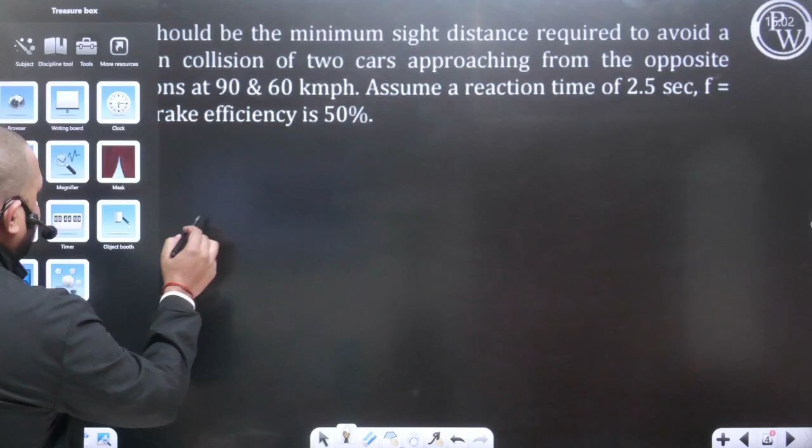So now we will start the discussion. First, starting with transportation engineering, this is question number one from transportation engineering. Everyone try to solve this question, and I will provide you 1 minute time for this question. For every question you are going to get 1 minute time, so in this time try to solve the question. Your time starts now, and tell me what will be the answer for this question.

So after 1 minute, we will have the detailed discussion.

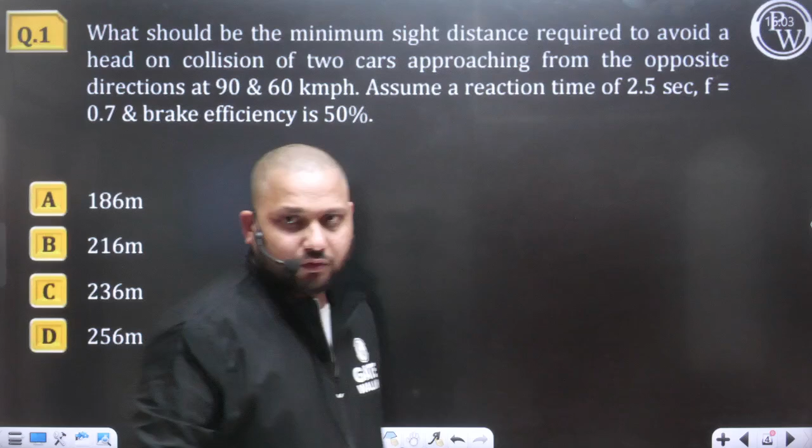Let's see the discussion for this question, let's see the solution part, and we are going to solve this question. So listen and see carefully. What should be the minimum sight distance required to avoid a head-on collision of two cars approaching from the opposite direction? As per the data given in the question, two cars are there, let's say car A and car B. These cars are approaching towards each other, and to avoid the head-on collision, what should be the minimum distance, what should be the visibility that should be available, that we need to find out.

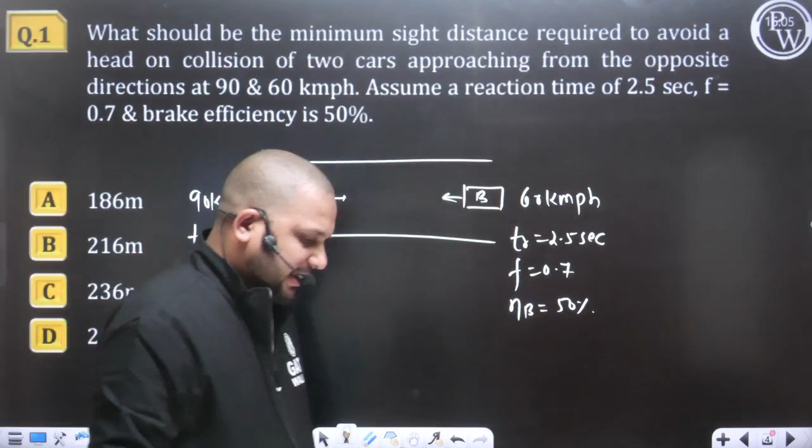The speed of vehicle A is given as 90 kmph, and speed of vehicle B is given as 60 kmph. Reaction time for both drivers, TR, is given as 2.5 seconds for both vehicles. F is given as 0.7, and brake efficiency is given as 50%.

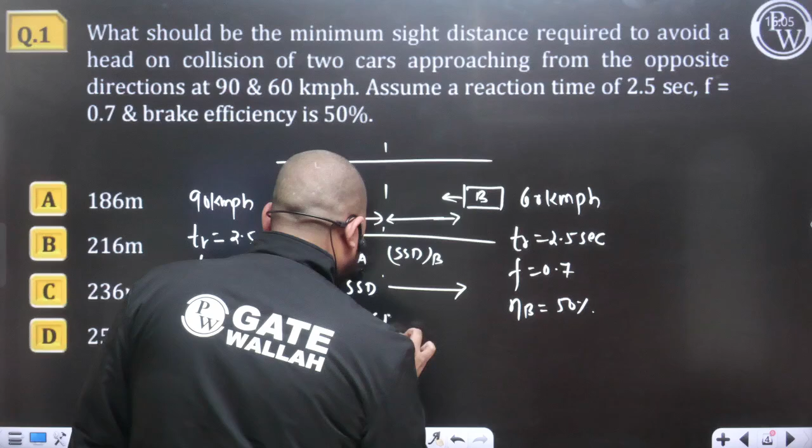So we have to consider the brake efficiency factor also for calculating the SSD. But for this case, we know when two vehicles are approaching towards each other, the minimum sight distance that should be available on the road to avoid the head-on collision is the distance required to stop vehicle A, which is SSD A, and similarly the distance required for vehicle B is SSD B. So the total visibility that should be available, that is the total SSD, will equal SSD A plus SSD B. So in this question, you need to simply calculate the SSD required for both vehicles, and the entire data is given to you.

So we can easily calculate the SSD. First we will calculate for vehicle A: SSD is V into TR plus V square upon 2GF. For the value of F, we can consider 0.5 into 0.7, that is going to be 0.35, considering the effect of braking efficiency.

So just put in all the values. For vehicle A, speed is given as 90 kmph. So we can write 90 into 5 by 18 plus 90 into 5 by 18 whole square, divided by 2 into 9.81 into 0.35.

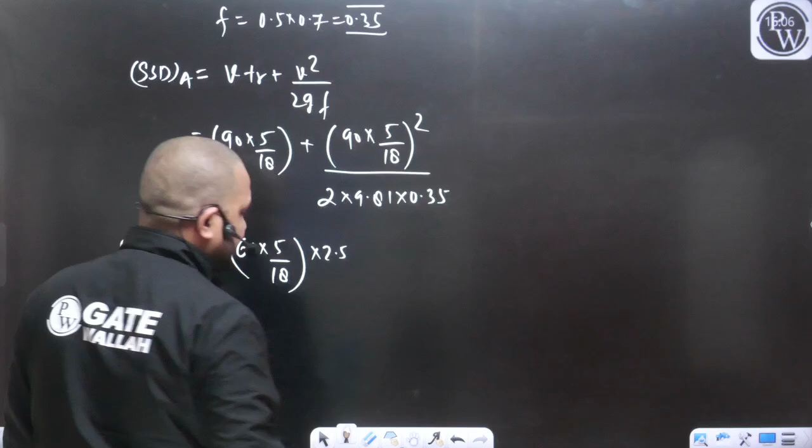Similarly, we can calculate the SSD for vehicle B, and the speed for this vehicle is given as 60 kmph. So 60 into 5 by 18, V into TR, 2.5 seconds that is the reaction time, plus 60 into 5 by 18 whole square, divided by 2 into 9.81 into 0.35.

So in this way you can calculate the SSD required for vehicle A, and similarly you can calculate the SSD required for vehicle B. To avoid the head-on collision that we just discussed, the minimum visibility that should be available on the road is SSD equal to SSD for vehicle A plus SSD for vehicle B. When you perform the calculation for both, the net resultant value you get will be approximately 236 meters.

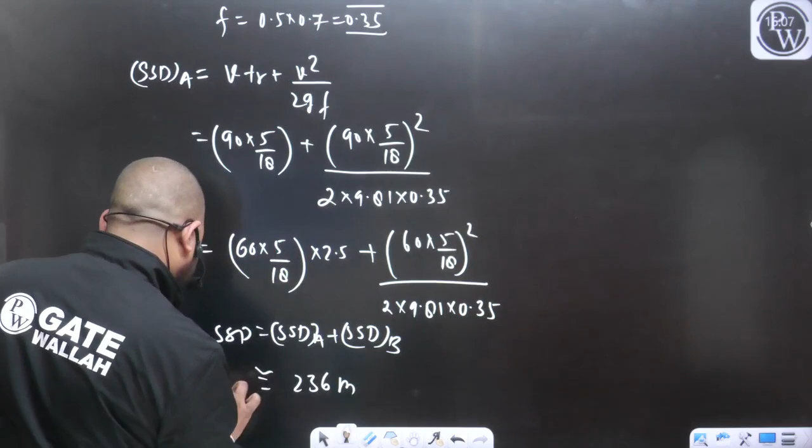To check the calculation part, that should be the answer. So for this question, that should be the answer. Based on this explanation, you can mark option C as the correct answer. So C is going to be the correct answer for question number 1.

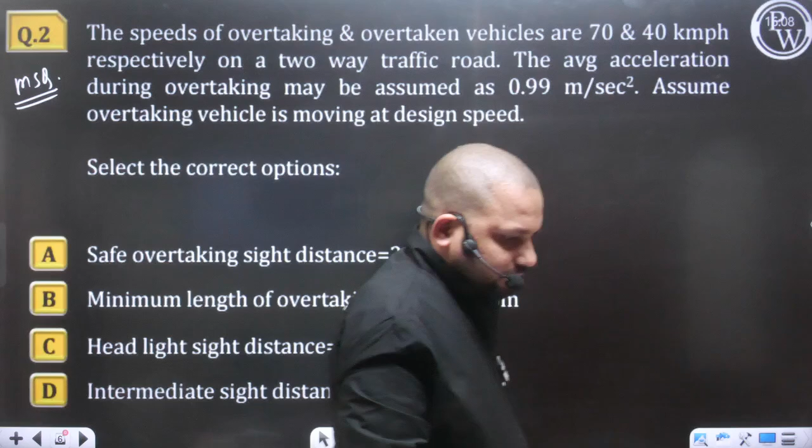Okay, very good. So now let's move to question number 2, and similarly try to solve this question. This question is MSQ, the format of this question is MSQ. Here you have to mark all the correct statements. Everyone try to solve this question, and I will provide you 1 minute 30 seconds time to solve it and tell me what the answer will be.

Okay, so I got the answer A and B. What about C and D? C and D are incorrect. So check all the statements, check for A, B, C and D, and mark the correct statements.

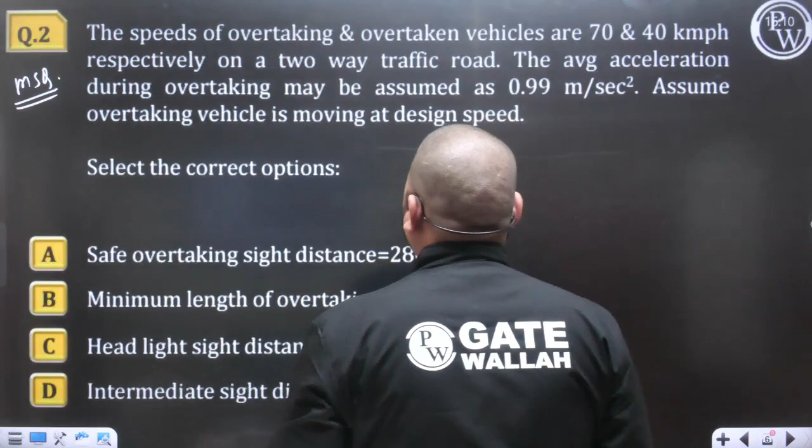Now we will have the detailed discussion on the speed of the overtaking and the overtaken vehicle. So let's see the discussion. Speed of the overtaking and the speed of the overtaken vehicle is given as 70 and 40 kmph, 70 kmph and 40 kmph. No problem.

Respectively, on a two-way traffic road, the average acceleration A is given as 0.99 meter per second square. Assume the overtaking vehicle is moving at design speed. Select the correct options below. First, we need to calculate the OSD.

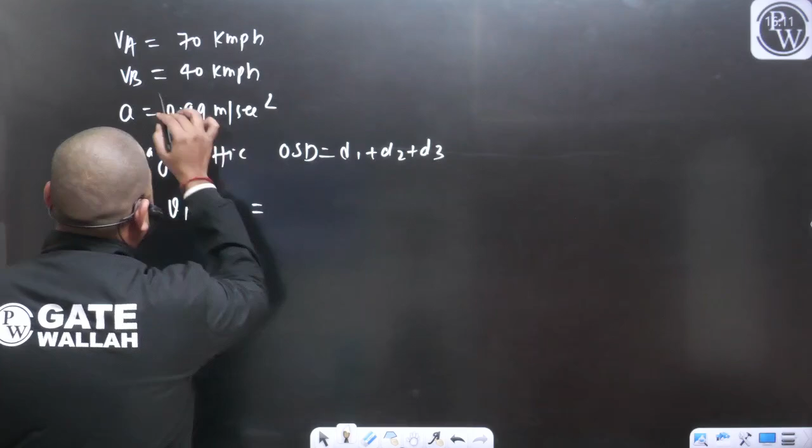So we can write for two-way traffic, OSD will be equal to D1 plus D2 plus D3. Yes, D1 plus D2 plus D3. We can calculate all these values. D1 is going to be VB into TH. VB is given as 40, so 40 into 5 by 18 into hesitation period, which we can consider as 2 seconds. From here we can calculate the value of D1.

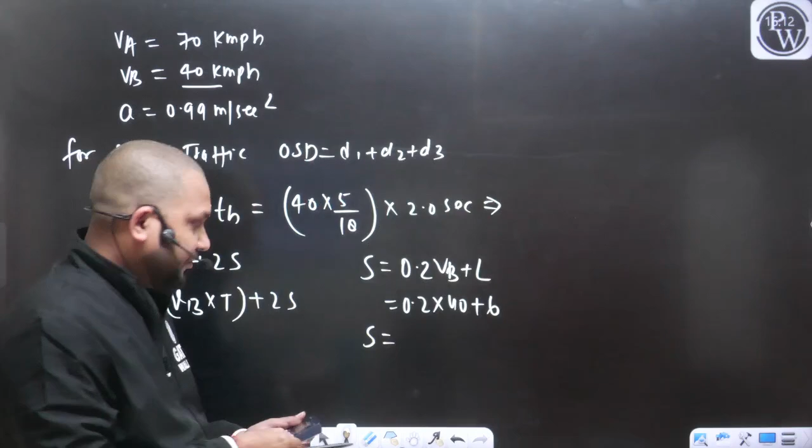Similarly, D2 is going to be VB into T plus 2S, which we can also write as VB into capital T plus 2S. The space headway we can calculate as 0.2 VB plus L. So 0.2 VB is going to be 40, L we can assume as 6 meter. The value of S you will get as 0.2 into 40 plus 6, that is going to be 14 meter.

So with the help of S we can calculate T. T is going to be under root of 4S upon A, so that is going to be 4 into 14 divided by 0.99. So T you will get in seconds: 7.52 seconds, that is going to be capital T.

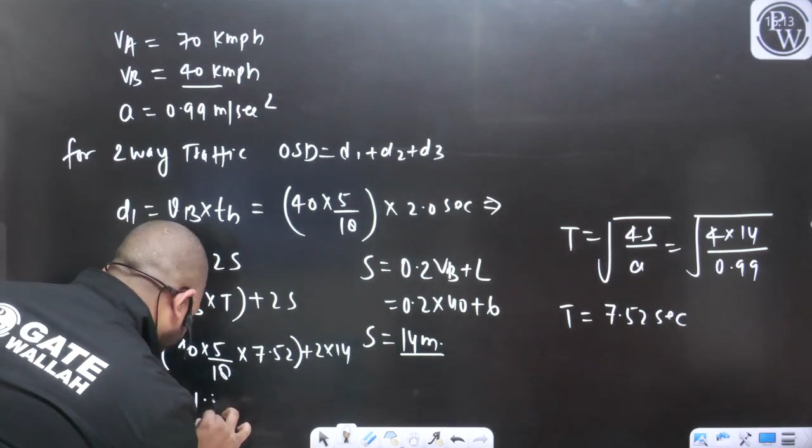Now we can find out the value of D2. D2 will be equal to VB, which is 40, into 5 by 18 into 7.52 plus 2 into 14, and that will be equal to 111.55 meter. Now we can calculate the value of D3, and D3 is going to be VC into capital T. We can assume VA is equal to VC. So this will be equal to 70 into 5 by 18 into 7.52, and that will be equal to 146.22 meter.

So now we can calculate the OSD. OSD will be equal to D1 plus D2 plus D3. D1 we have calculated—D1 we have not calculated. Let's calculate.

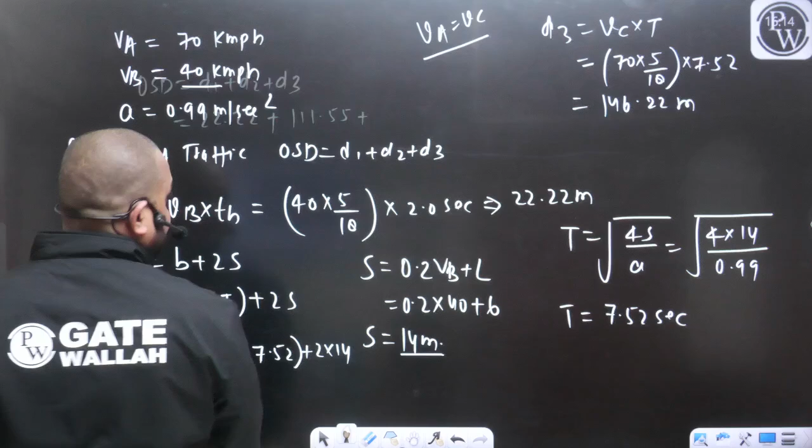So D1 is going to be 22.22 meter, D2 is going to be 111.55, and similarly D3 we have calculated as 146.22. So total OSD that is required will be equal to 279.99 meter. This is the value of the required OSD.

This is the value of the required OSD for the given data. So option, safe overtaking sight distance is equal to 280.2 something. So option A is correct.

Minimum length of the overtaking zone. So we know OSD is going to be, let's say, 280. So minimum length of overtaking zone, we can check for B. As per IRC, this is going to be 3 times of OSD. So 280 into 3, that is going to be 840 meter. Statement B is also correct.

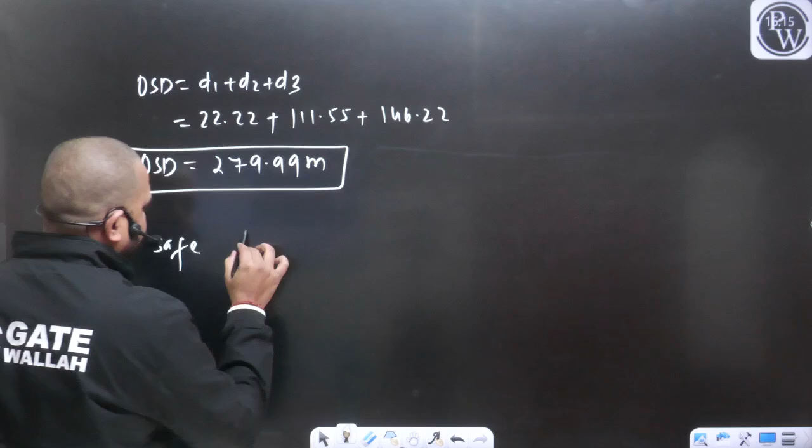Headlight sight distance is 100 meter. To check for this statement, we know for safe traffic operation, HSD should be equal to SSD, and that is going to be V into TR plus V square upon 2GF. Instead of GF, we can use the term A. So this is going to be V into TR plus V square upon 2A. And the design speed we can consider as 70 kmph. So for this road, we can calculate the required SSD. So 70 into 5 by 18 into reaction time we can consider as 2.5 second, plus 70 into 5 by 18 whole square divide by 2 into 0.99. Solve, you will get the value.

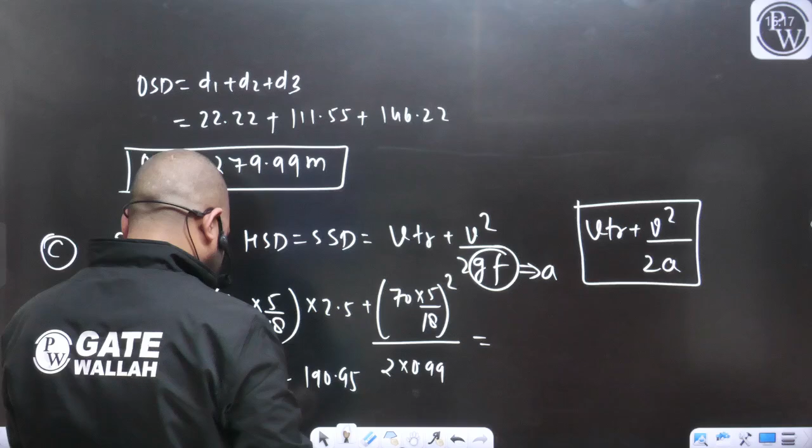So lag distance you are going to get 48.61, plus braking distance you can calculate, please cross check all the calculation part, this is going to be 190.95. So SSD is going to be 239.56 meter. So headlight sight distance will not be equal to 100 meter. This statement is incorrect. Intermediate sight distance will be equal to 2 times of the SSD. This is also incorrect.

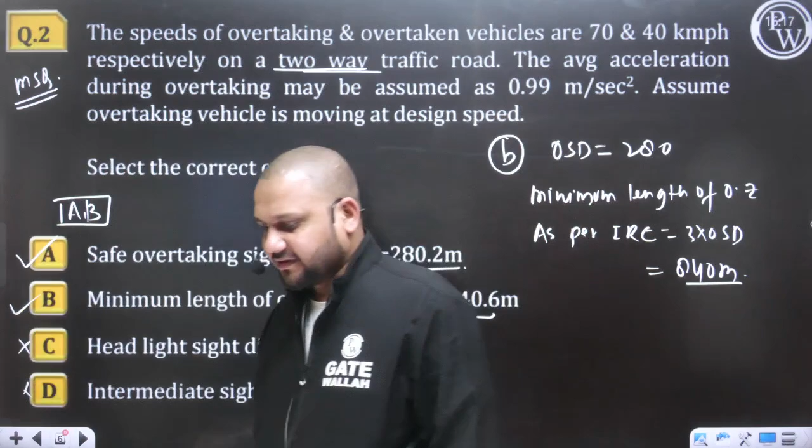So based on this explanation, A and B should be the correct answer for this question. Please cross check all the calculation part. The discussion for this question is clear to everyone? The question was related to the OSD, overtaking sight distance.

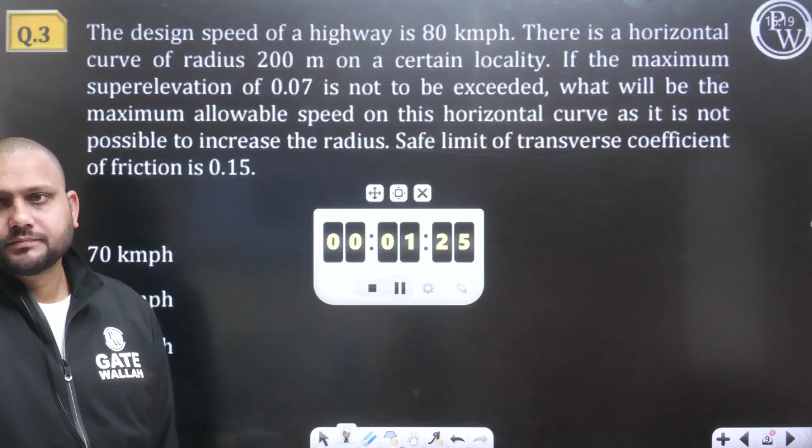Let's see the solution part. In this question, the design speed of the highway is given as 80 kmph. There is a horizontal curve of radius 200 meter on a certain locality. If the maximum super elevation E max that we can provide is 0.07, and F we are providing as 0.15, what will be the speed they have asked? First we will go for the design super elevation V square upon 127R. So this will be equal to 80 square divided by 127 into radius of the curve given as 200. So we can calculate the design super elevation.

Let's see the discussion beta, we are solving the question. Whatever answer we get, we will mark as the correct answer. So this is going to be 80 square divided by 127 into 200. That will be equal to 0.25. It should not be greater than 0.07. So E is going to be 0.07.

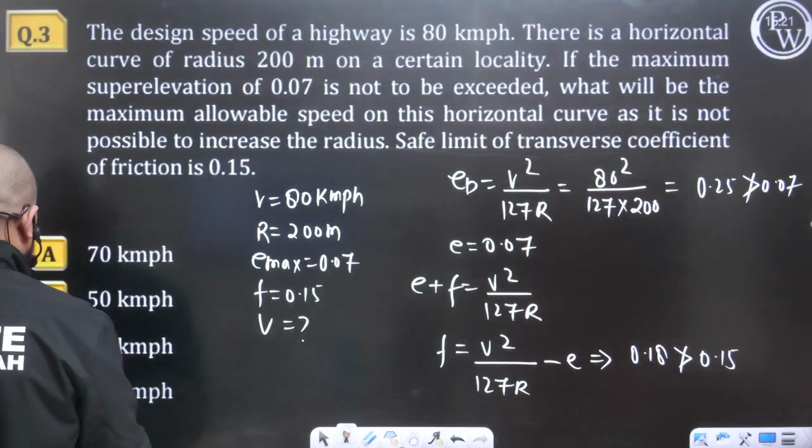Now we can check for F. So F will be equal to V square upon 127R minus E. So that will be equal to 80 square divided by 127 into 200 minus 0.07. That is coming out to 0.18. It should not be greater than 0.15. Both conditions are given, so now what we can do? We can consider E as 0.07 and F will be equal to 0.15.

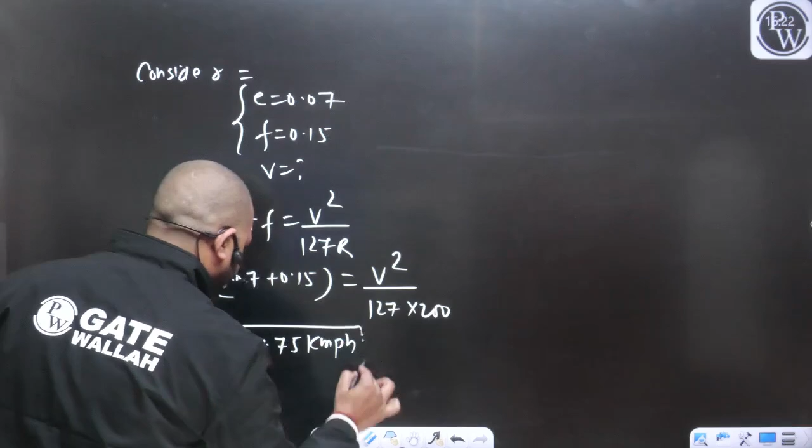Now based on these two parameters, when E is equal to 0.07 and F is equal to 0.15, what should be the restricted speed? So E plus F is equal to V square upon 127R. So 0.07 plus 0.15 should be equal to V square upon 127R, given R as 200. So we calculate 0.07 plus 0.15 into 127 into 200, under root, answer 74.75 kmph. V restricted or V allowed is 74.75 kmph, when E reaches its maximum value and F reaches its maximum value. Based on this E and F, we calculate the restricted speed, which is 74.75. The nearest option available is A, so we can mark A as the correct answer.

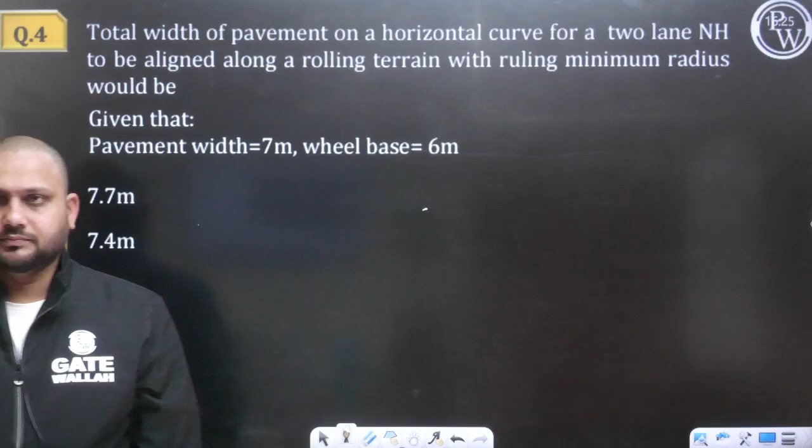Have you got your answer? Okay, so now let's move further.

Total width of the pavement on the horizontal curve for a two-lane road to be aligned along rolling terrain with ruling minimum radius would be... Pavement width is given as 7 meters, length of wheelbase is given as 6 meters. So what will be the total width? W plus WE. In this question you need to find the extra widening. But for extra widening we require the value of R, so we can calculate it.

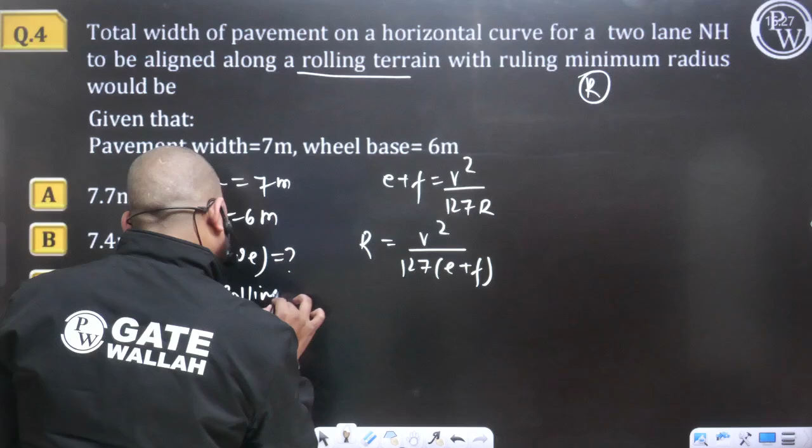So we know E plus F is equal to V square upon 127R. From here we can calculate R minimum, which is V square upon 127 times E plus F. For rolling terrain, your E maximum will be 0.07 and F will be 0.15. V is given to you. We can consider V as 80. This is the total pavement width on a horizontal curve for a national highway.

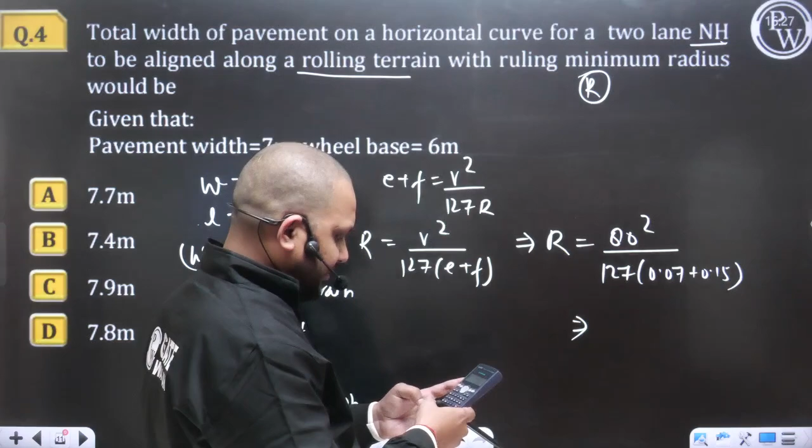For rolling terrain, the design speed is 80 kmph as per IRC. So now we can put in all the values to find R. R will be equal to 80 square divided by 127 times 0.07 plus 0.15. From here we can calculate the radius: 80 square divided by 127 into 0.07 plus 0.15, that will be equal to 229.0 meters. So now based on this data we can calculate the total extra widening required.

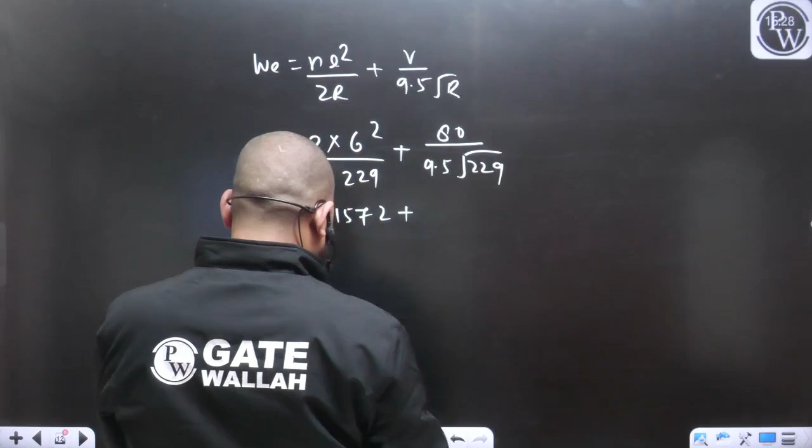The formula is NL square by 2R plus V upon 9.5 under root R. For two lanes, length of wheelbase is given as 6, so 6 square divided by 2 into radius we just calculated, 229, plus 80 upon 9.5 under root 229. From here you can calculate the total extra widening required in meters. Mechanical extra widening is going to be 0.1572, and psychological extra widening will be equal to — please do cross-check all the calculation parts — 0.5564. So total extra widening will be equal to 0.7136 meters.

So total width of pavement on the curve will be W plus WE: 7 plus 0.7136, which equals 7.7136 meters. For a two-lane road, as per IRC, your W is 7 meters — the width of the carriageway or pavement is 7 meters. So total width required on this curve equals W plus WE, where W is width of pavement and WE is total extra widening required.

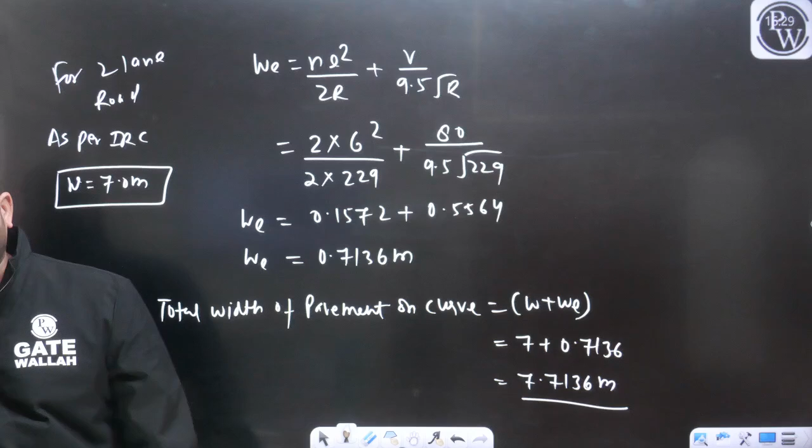So let's see the option: 7.71. So we can mark A as the correct answer for this question. I hope the entire discussion is clear to everyone. Based on this data and explanation, you can mark A as the correct answer. Please confirm in the chat box if the discussion is clear to everyone.

Clear. Okay, very good. So now let's solve the next question, question number 5.

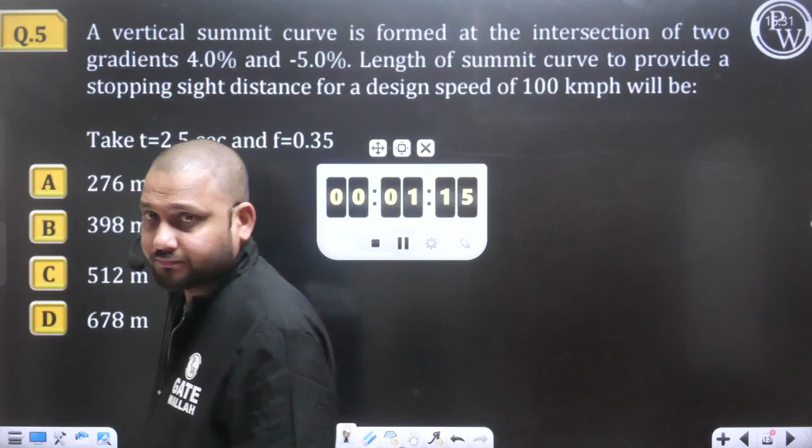So what will be the answer for this question? I hope you all are solving the question. Take 2 minutes to solve this question, then we will have the discussion.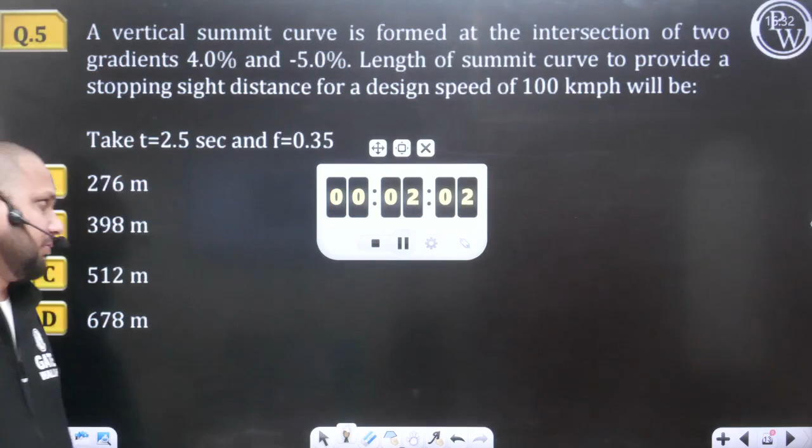Now let's see the discussion and the solution. A vertical summit curve is formed at the intersection of two gradients, plus n1 is given as 4%, minus n2 is given as minus 5%. So N is the algebraic difference of the grades: 4 minus minus 5%, which gives 0.09. This is the deviation angle.

Length of the summit curve you need to find out. What will be the length of the summit curve? Speed is given as 100 kmph, reaction time of the driver is given as 2.5 seconds, and f is given as 0.35. So we can design the length of summit curve.

Based on sight distance criteria, length of curve is calculated using SSD.

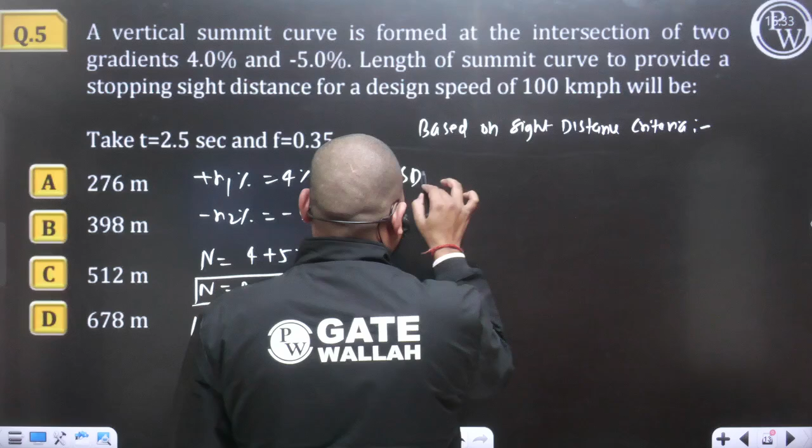SSD is V into TR plus V square upon 2GF. So V is given as 100, so 100 into 5 by 18 into TR which is 2.5, plus 100 into 5 by 18 whole square divided by 2 into 9.81 into 0.35. From here you can calculate the SSD. Let's perform the calculation.

So this is going to be 181.80 meters. Now we are assuming length of curve is greater than sight distance. For this condition, we can use the standard formula.

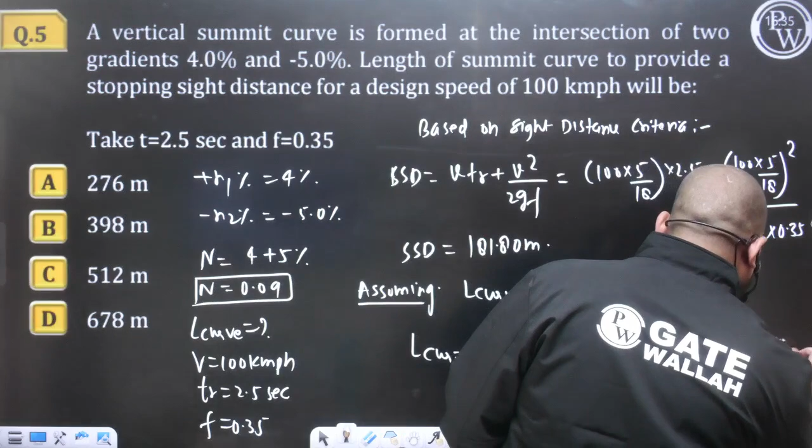Length of curve will be equal to NS square upon 4.4 for SSD. So this is 0.09 into S, which is 181.8 whole square, divided by 4.4, and that will be equal to 676.11 meters.

676.11 meters. What was our initial assumption? Assumption was length of curve is greater than sight distance. Sight distance value is given as 181.80 meters, length of the curve we calculated is 676.11 meters. That means our assumption is valid, so we can mark D as the correct answer for question number 5.

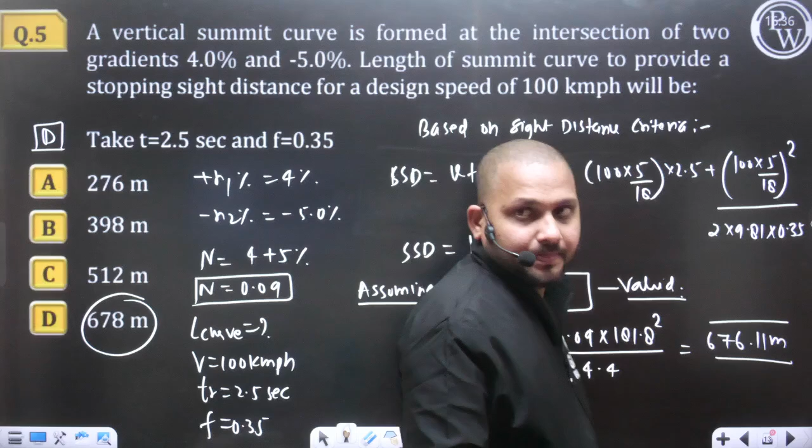Is the discussion clear to everyone?

Now let's see the discussion for the next question, question number 6. Here you need to calculate the length of the valley curve based on both criteria: the HSD criteria (headlight sight distance criteria) and the comfort criteria.

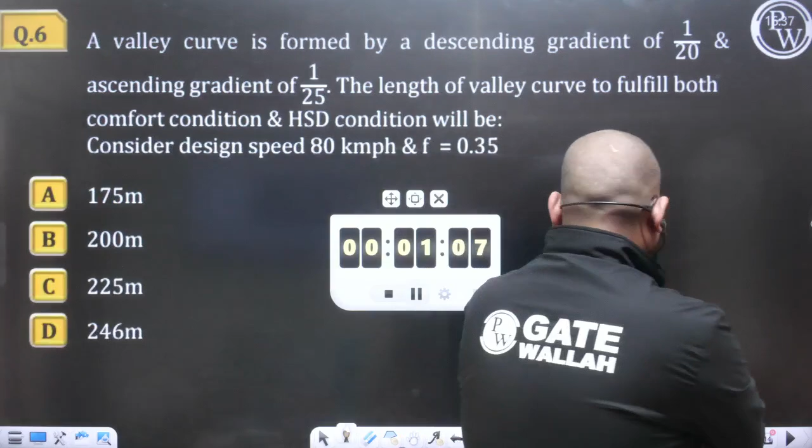I hope you all have tried this question. This question is related to the length of the valley curve, related to how you can calculate the length of the valley curve required.

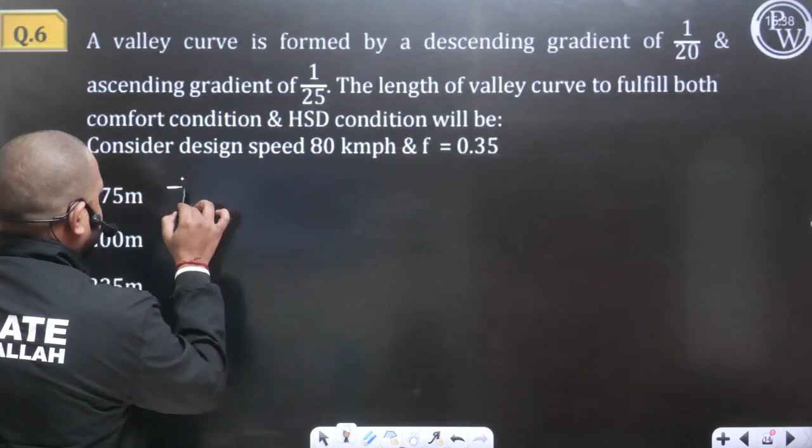Let's see the discussion for this question. I have provided you 2 minutes time, now we will have the discussion. What concept is required to solve this question? A valley curve is formed by a descending gradient minus n1%. N1 is given as minus 1 by 20, and plus n2 is given as plus 1 by 25.

From this data we can calculate the algebraic difference of the grade, the mod value of the algebraic difference of the grade in case of valley curve. Please cross check, you are getting this value as again 0.09. We will calculate the length from both criteria. Speed is given as 80 kmph and f is given as 0.35.

First we will calculate based on HSD criteria. So now what we can write: for safe movement, HSD should be equal to SSD, which is V into TR plus V square upon 2GF.

Design speed is given as 80, so 80 into 5 by 18, reaction time of the driver we can consider as 2.5 seconds, plus 80 into 5 by 18 whole square divided by 2 into 9.81 into 0.35. From here you can calculate the value of the SSD.

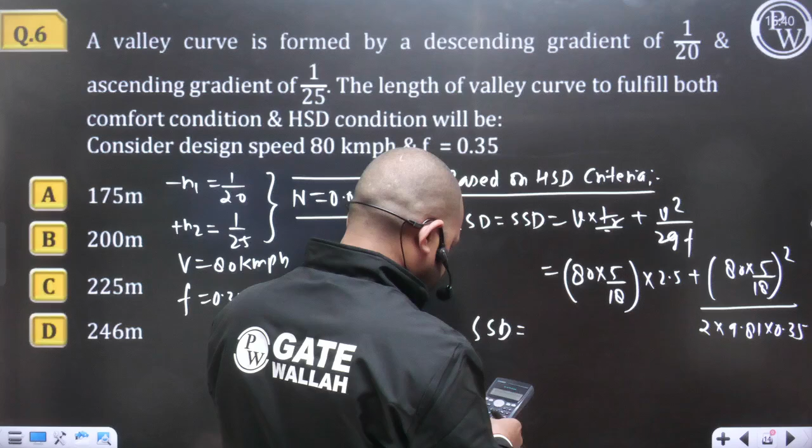So this is going to be 127.46 meters. Now we can calculate the length.

Length of the valley curve will be equal to, assuming length of the valley curve is greater than sight distance: NS square upon 2h plus 2S tan alpha. So N is 0.09 into S, which is 127.46 whole square, divided by 2 into 0.75 plus 2 into S, this is 2h plus 2S tan alpha, so this is 2 into 127.46 into tan 1 degree.

From here you can calculate the length of the valley curve. Tell me the value that you are getting.

245.75 meter. This is going to be the length of valley curve required based on the HSD criteria.

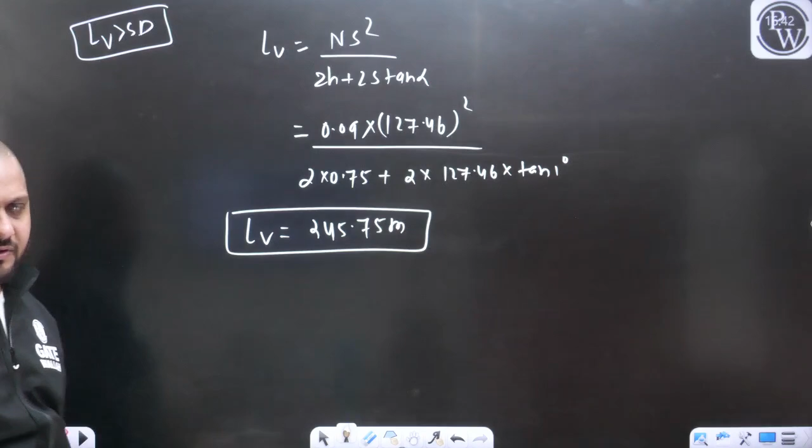But this will not be the final answer. We have to also calculate the length of valley curve based on the comfort criteria. This is going to be 0.38 under root of NV cube. So 0.38 under root 0.09 into V, where speed is given as 80. So this is going to be 80 cube. Solve.

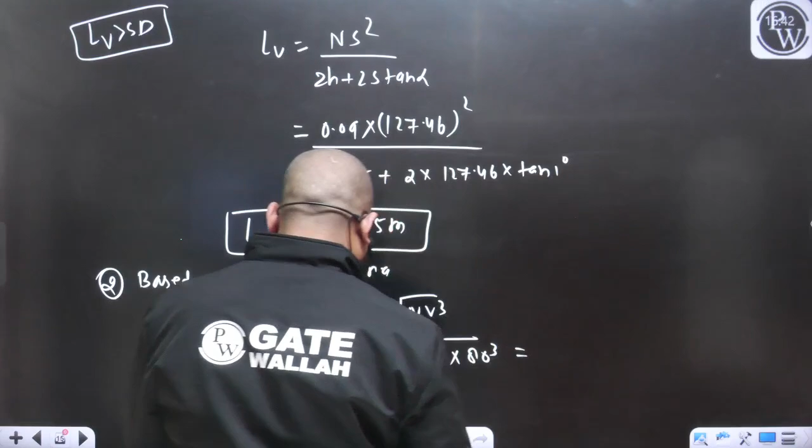81.57 meter. So what will be the answer? Length of valley curve will be equal to the maximum of 245.75 meter and 81.57 meter. So length of valley curve will equal to 245.75 meter. This is going to be the answer. Whatever maximum value we get from both the criteria, that finally we will provide as the length of the valley curve. Yes or no?

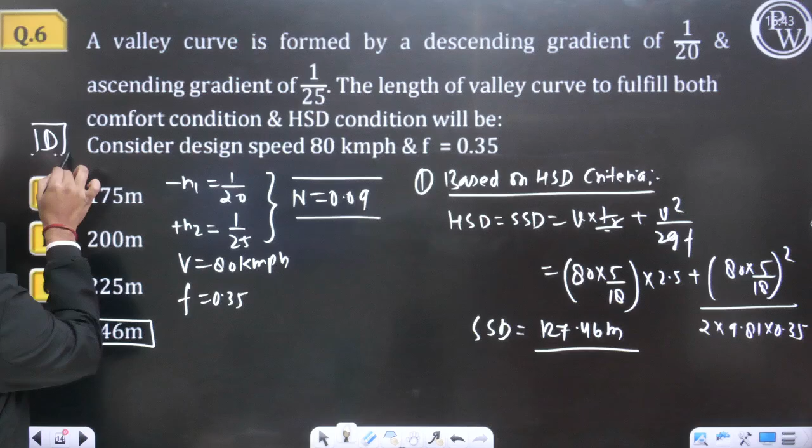So based on this explanation, 245.75, that means nearly equal to 246 meter. So D is going to be the correct answer for this question number 6. D will be the correct answer.

So now let's move to the next question. Question number 7. Try to solve this question.

What's wrong with the timer?

And your time starts now.

In this formula 0.38 under root NV cube, V will be in kmph.

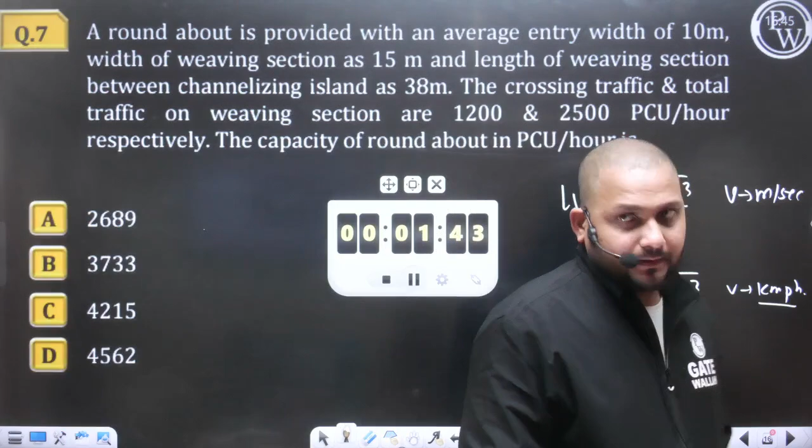So let's see the discussion for this question. This question is related to the capacity of the rotary. A roundabout is provided with the average entry width E1 plus E2 by 2.

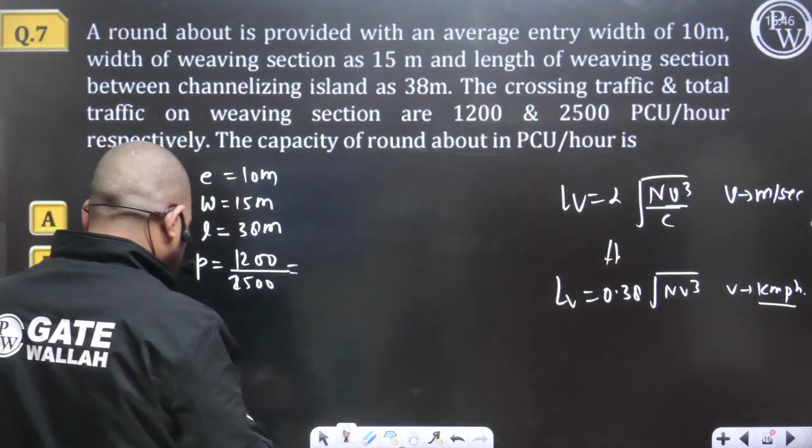So E will be equal to 10 meter. Width of the weaving section W is given as 15 meter. Length of the weaving section is given as 38 meter. Crossing traffic and total traffic. With the help of these two traffic values, we can calculate the proportioning ratio or weaving ratio, that is, weaving traffic divided by total traffic. So that will be equal to 0.48.

Okay, so what will be the capacity of the rotary? We can calculate C is equal to 280 into W, 1 plus E by W, 1 minus P by 3, divide by 1 plus W by L. So 280 into width of the rotary given as 15, 1 plus E, average width given as 10, so 10 by 15, 1 minus 0.48 by 3, divide by 1 plus W by L, that is 15 by 38. Yes, you need to remember this formula.

So from here you can calculate the capacity in PCU per hour, and that will be equal to, solve it.

5018.86, check the calculation part. Are you getting the same value? Check the calculation part and confirm. I think there is some error in the calculation.

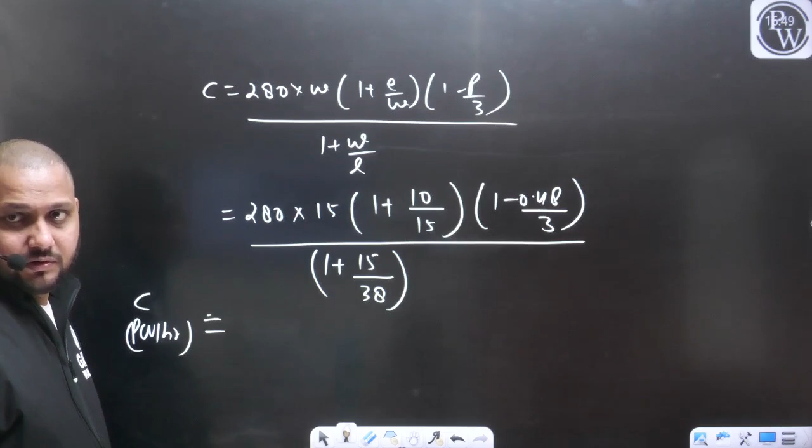Solve this value and tell me the final answer. Calculate. I have taken all the values, you just need to calculate. You have considered same values. 4215.8. So based on this explanation, we can mark C as the correct answer for this question.

So in this question, you need to remember this formula. That formula you should know, then only you will get your answer. So now let's move to the next question, and everyone try to solve this question.

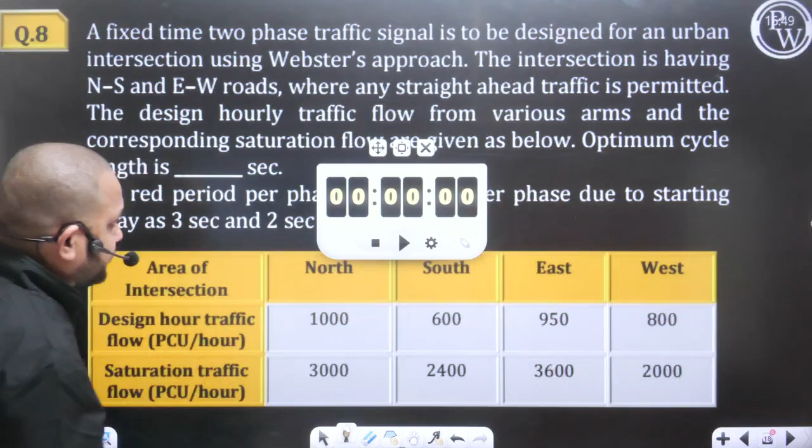So this is the design traffic Q, and this is the saturation traffic S.

So everyone try to solve this question. This question is related to the design of signal by Webster's method.

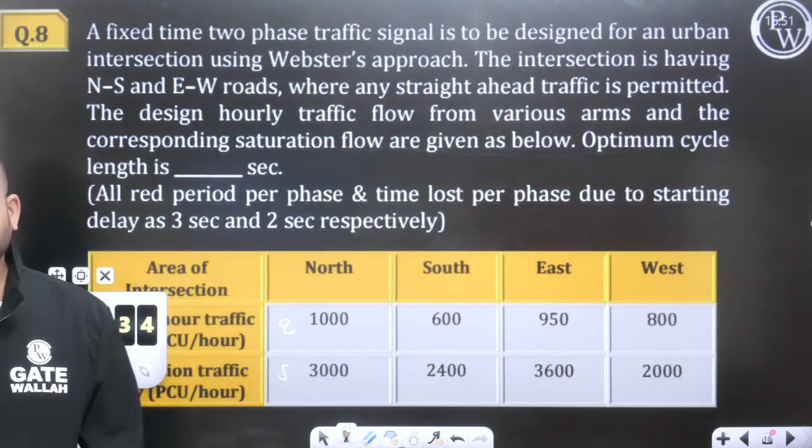Should I start the explanation for this question? I hope you have all tried this question. So first try to understand what data they have provided in the question and how we can proceed. A fixed time two-phase signal is to be designed for the urban intersection using Webster's approach. The intersection is having the north-south and east-west road where only straight traffic is permitted. There is no left turning traffic. There is no right turning traffic in this case.

The design hourly volume and the saturation flow is given to you. You need to calculate the optimum cycle length.

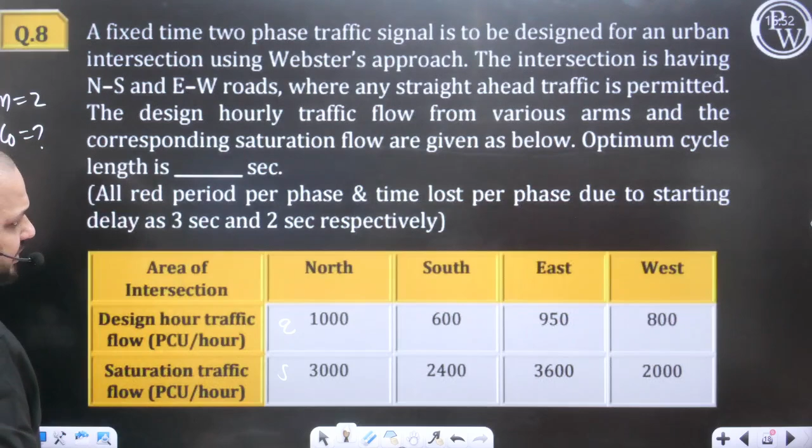All red period per phase is given, and time loss per phase due to the starting delay is going to be 3 second and 2 second. So all red is given as 3 second per phase. And again, startup loss is given as 2 second per phase.

So can you tell me the value of the total time loss in a cycle? There is two phase signal, 3 second for all red and 2 second for startup loss. So total time loss is going to be 10 second in a cycle. In an entire cycle, there will be a loss of 10 second due to the all red and startup delay.

Clear? So this was the important point. Now we can calculate. So C naught is going to be 1.5 into L plus 5 upon 1 minus capital Y. So capital Y is going to be Y1 plus Y2.

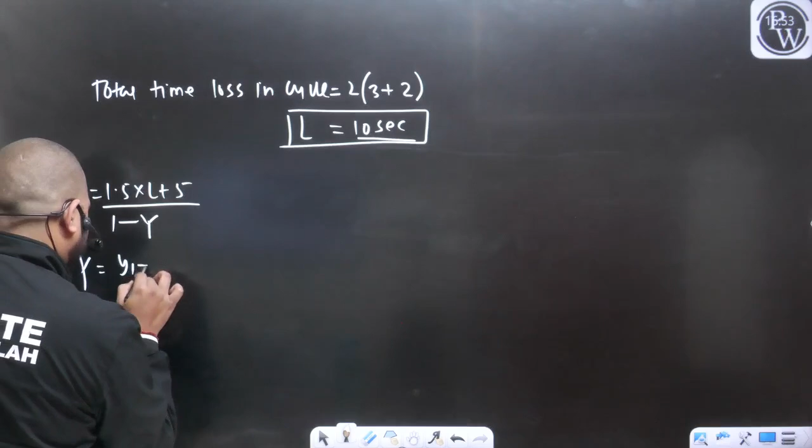So we need to calculate for north-south road. North-south: for north this is going to be 1000 by 3000, and for south it is going to be 600 by 2400. Similarly for east and west: for east, 950 by 3600, and for west the value is going to be 800 by 2000. Calculate all these values.

So this is going to be 0.33, this is going to be 0.25. Check the calculation part: this value will be equal to 0.26, and this will be equal to, I think, 0.4.

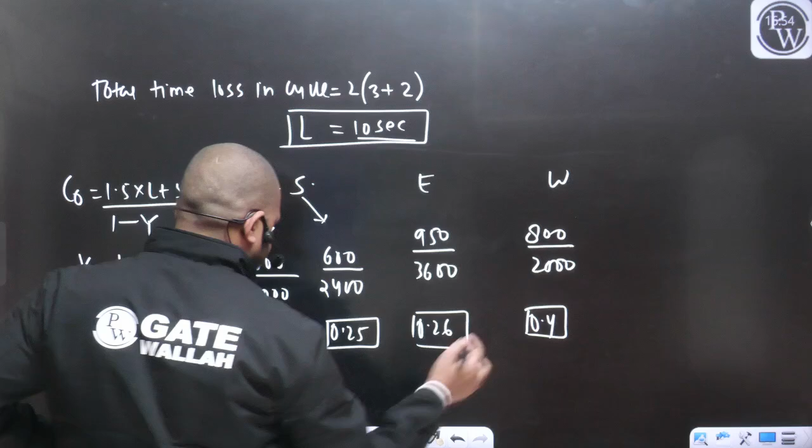So that we will consider as y1. This value we are going to consider as y1. This value will be equal to y2. So capital Y will be equal to 0.33 plus 0.4, which is 0.73. Now we can calculate the optimum cycle length.

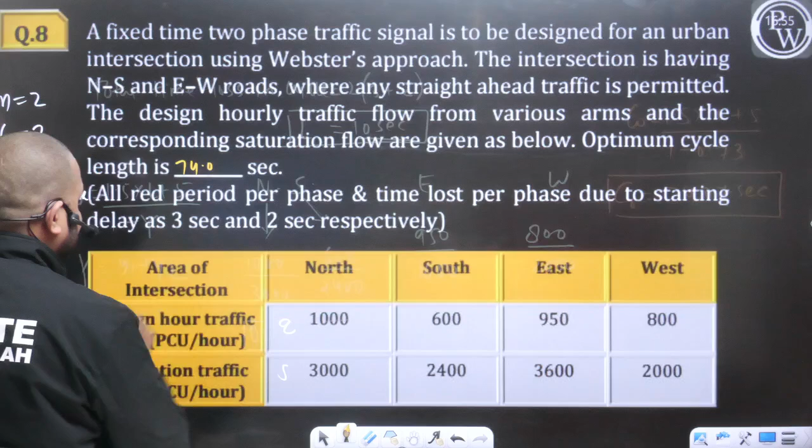So C naught is going to be 1.5 into L plus 5 upon 1 minus capital Y. So that will be equal to 74.07 second. Optimum cycle length as per the Webster method is going to be 74.07 second.

74.07 second is going to be the answer. This will be the correct value for the optimum cycle length as per the Webster's method.

I hope the discussion is clear to everyone. So the main key point in this question was how we are calculating the total lost time in a cycle. N number of ways are there where they can provide you the data for the calculation of the total lost time. When there is no startup loss, when there is no clearance loss, then we can use L is equal to 2n plus R, where R is the all red time and n is the number of phases.

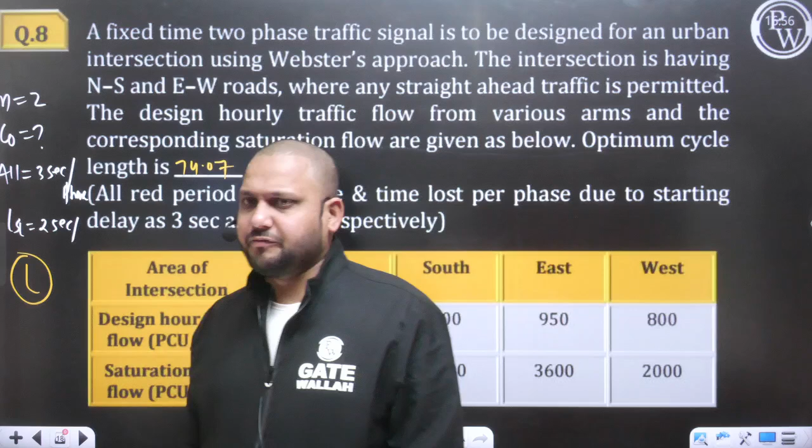But in this question, they have selected another approach to calculate the total lost time. They have mentioned all red per phase and startup loss per phase. Based on this data, we have calculated the total time lost in a cycle. L is the total time lost in a cycle, not in a phase.

I hope the entire discussion is clear to everyone. You just need to focus and be careful while calculating the value of L in the case of design of signal by Webster's method. This is the only point in this method where you can commit a mistake.

Let's see the discussion for the next question. This is your question number 9. Solve and tell me the answer in the chat box.

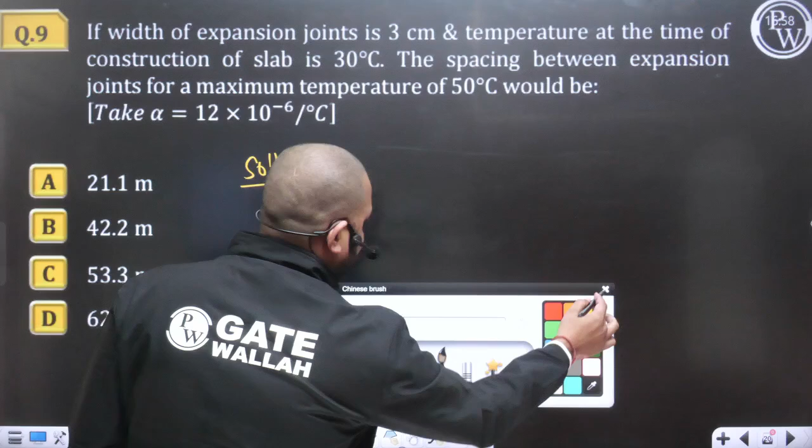Okay, so D. Let's see the solution for this question. What they have provided: the width of the expansion joint, delta, is given as 3 centimeter. Temperature at the time of construction, T standard, is given as 30 degrees Celsius. T maximum is given as 50 degrees Celsius. Alpha will be equal to 12 into 10 to the power minus 6 per degree Celsius. So what will be the spacing of the expansion joint?

So we can write the total expansion allowed in the case of rigid pavement as per IRC recommendation. IRC has recommended that we provide the delta gap such that after allowing the full expansion of the pavement, there should be a remaining or left gap of delta by 2. I hope you remember this guideline. So the maximum expansion that may occur in the case of rigid pavement is going to be delta by 2. So delta by 2 will be equal to L alpha delta T.

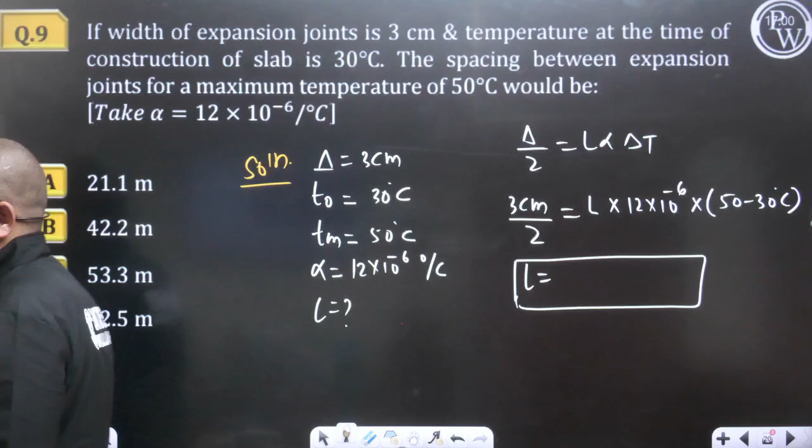So this is going to be 3 centimeter by 2 will be equal to L, 12 into 10 to the power minus 6 into delta T, which is 50 minus 30 degrees Celsius. So from here we can calculate the value of L. Take proper care of units.

So what you will get? L is going to be 62.5 meter. The value of L you will get as 62.5 meter. So based on this explanation, D is going to be the answer.

And this is the important guideline. We will provide the gap delta such that after allowing the full expansion of the pavement, there should be a remaining or left gap of delta by 2. This was the IRC guideline. And in this gap, we will fill with lower density material like rubber or fiber board, so that while expanding, the pavement material can get compressed and we can allow free expansion.

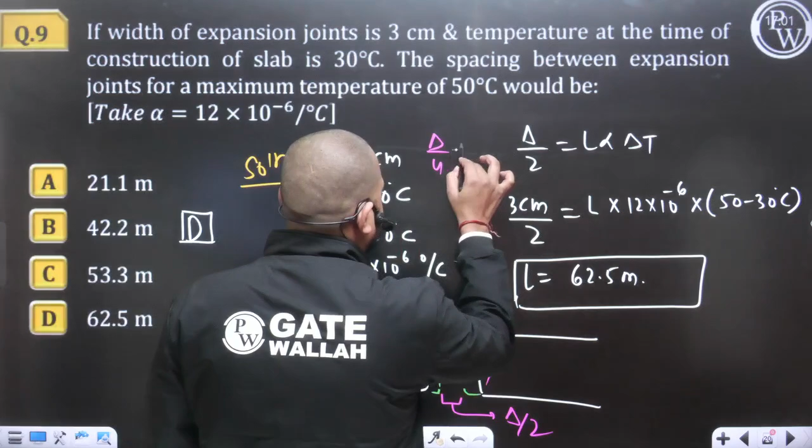So this was the point. So this maximum expansion is going to be delta by 4 plus delta by 4. So maximum expansion of the pavement will be equal to delta by 2. So based on this explanation, you can mark D as the correct answer for this question.

So now let's move to the next question. Now we will discuss some question related to surveying, and what will be the answer for this question. This question is again MSQ. We have considered all type of questions that they may ask in your GATE exam. We have discussed MCQ, NAT, and MSQ type questions. So what will be the answer?

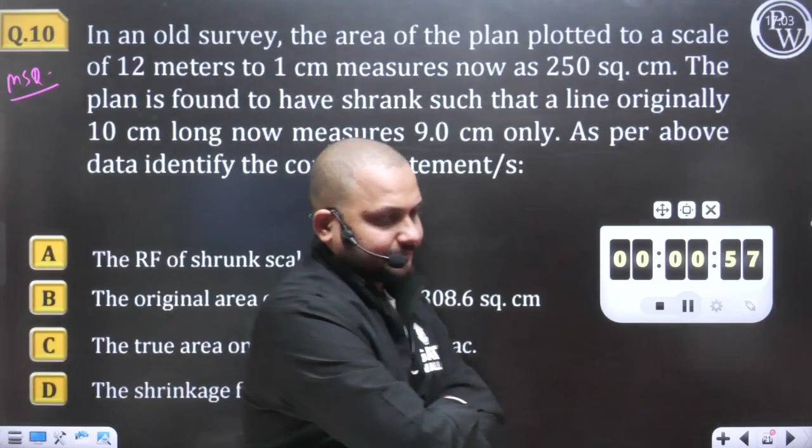So this is the very simple and basic question related to the concept of shrunk scale. I hope you all can answer on your own. But don't worry, if any discussion is required, I will provide you the detailed discussion.

Thanks, dear. Thanks. Thank you, everyone.

So can we move to the next question? What will be the answer for this question? Let's see the discussion, what they have provided and what they are asking.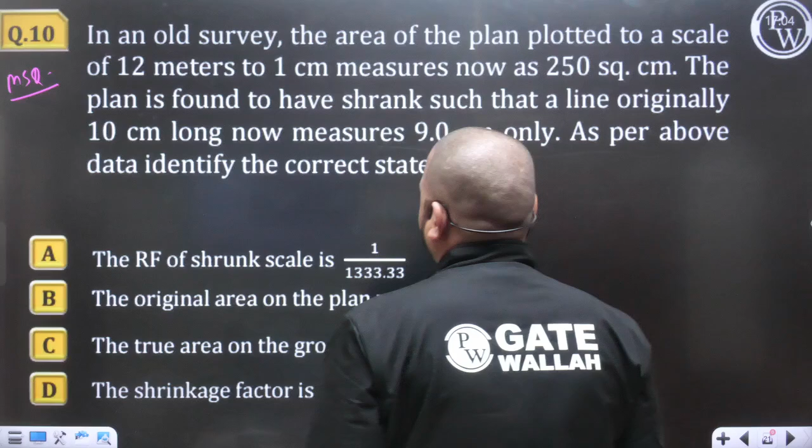In an old survey, the area of the plan plotted to a scale of 12 meter to 1 centimeter measures 250 square centimeter. The plan is found to have shrunk such that a line originally 10 centimeter long is now measured 9 centimeter. As per the above data, identify the correct statement.

So what is the first point? The RF of the shrunk scale: original scale was 1 centimeter equal to 12 meter, so 1 by 1200 in terms of RF. Now we can calculate the shrinkage factor. That is going to be 0.9 - 9 centimeter divided by 10 centimeter.

So revised scale will be equal to 1 by 1200 into 0.9, so 1 by 1200 by 0.9, that will be equal to 1200 by 0.9, which is 1333.33. First statement is correct.

Second, the original area of the plan: the measured area is 250, so divide by 0.9 square, that will be equal to 308.64 centimeter square.

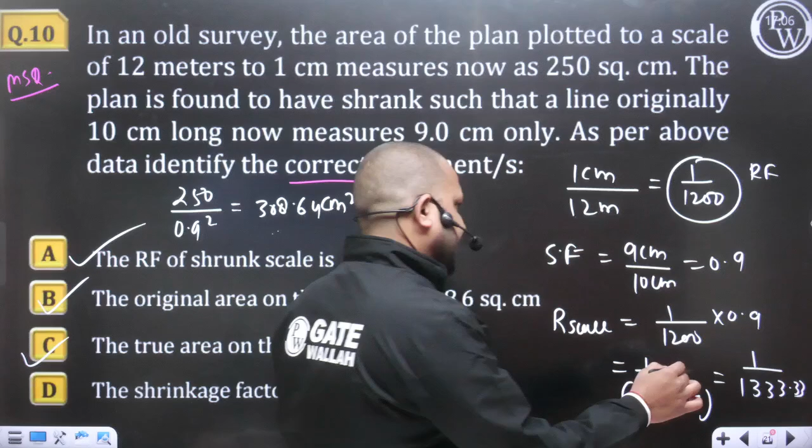B is also correct. The true area on the ground is 4.44, that value you will get. So based on the revised scale, can we calculate the true area? The shrinkage factor is 1.11? No. The shrinkage factor that we have calculated is 0.9. So based on this explanation, you can mark A, B, C as the correct answers.

Area you will get - convert the map area into the ground area based on the revised scale, and finally convert the area into hectare. So I think this value is correct. Perform the calculation part. So this was the discussion for this question.

Now let's move to the next question, that is question number 11. Again a very simple question, based on your geodetic leveling part. So what will be the answer for this question?

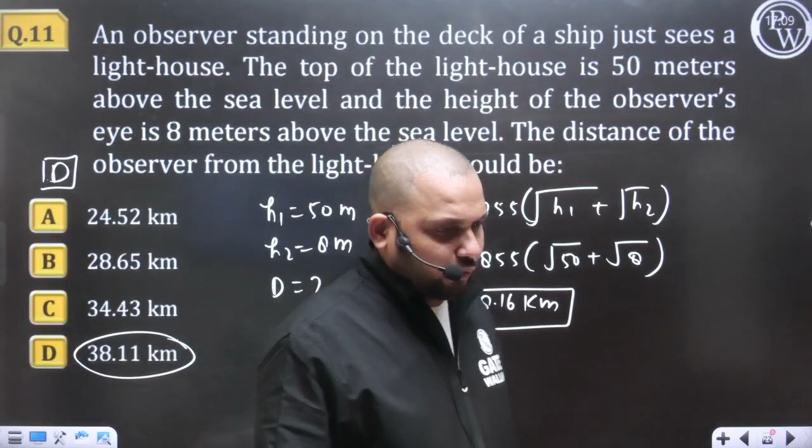So there may be one more case. We have discussed in the case of distance of visible horizon, two cases. Case 1 was related to when there was only one observer, and case 2 was when two observers were there. In that case, what will be the total distance of the visual horizon? That we can calculate with the help of this approach. And the correct answer for this question is going to be D.

So now let's move to the next question. Question number 12. What will be the answer? Everyone try to solve, the topic is very important. You can expect a question in your GATE 2023 exam related to this concept. This question is related to the traverse survey. Similar kind of question you can expect.

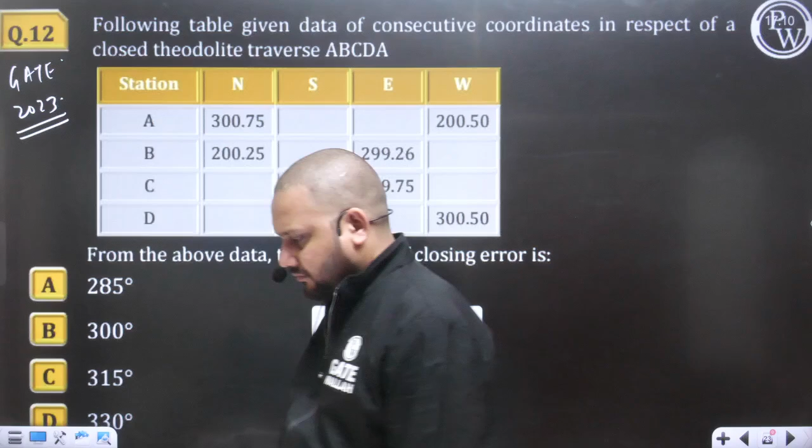So, closing error or error of closure. For closing error, how we can calculate the magnitude, and how we can calculate the direction of the closing error. This is the important discussion.

Yes, so have you got the answer for this question? What will be the answer? Mark your answer in the chat box. Everyone try to solve, we have already discussed these type of problems in our classes. So it's very simple question, all of you can solve. So let's see the discussion.

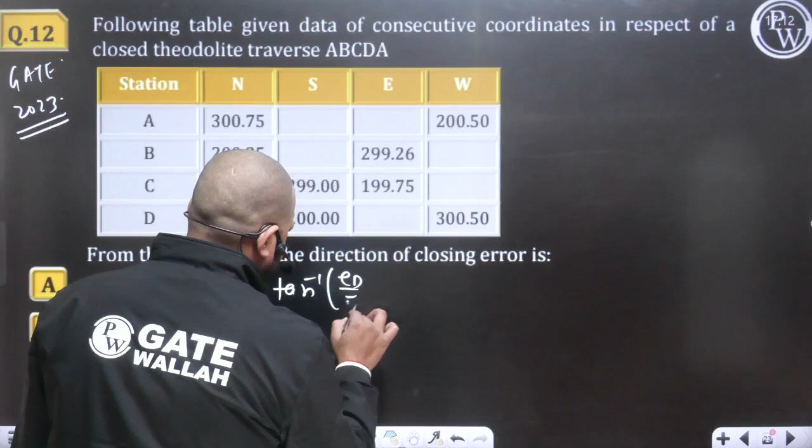We can consider north latitude as positive, south latitude as negative, east departure as positive, and west departure as negative. So can we find out the algebraic summation of all the latitudes? If the algebraic summation of all the latitudes does not come to zero, that will be equal to error in latitude. If algebraic summation of all the departures is not equal to zero, that will be equal to error in departure. So we can find out the error in latitude and error in departure.

So I need to solve. 500.1, so plus is going to be 500.1. Yes, if I am not wrong, 10. No, no. 501, this will be the value. So 501.0, and this will be equal to 499.0, sorry, this will be equal to minus, plus minus minus, so this is going to be minus 499. This will be equal to plus 2. Yes or no? Similarly, error in departure, I think you will get minus 2.

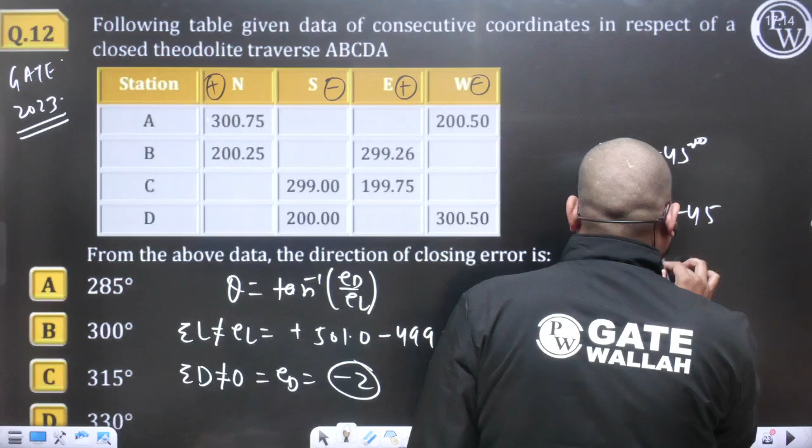So theta you will get minus 45 degree. In WCB system, we have to represent theta. So final theta will be equal to 360 minus 45, which will be equal to 315 degree. So this will be the direction of the closing error. Based on this explanation, you can mark C as the correct answer for this question.

So now let's move further. Question number 13. What will be the answer? Again the question is MSQ. So everyone try to solve the question and tell me the answer in the chat box.

The question is related to the reciprocal leveling. The problem is related to reciprocal leveling.

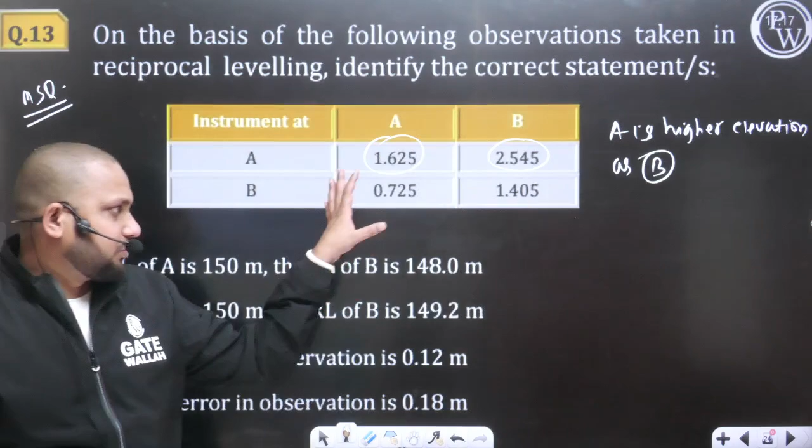Based on these two observations, can we simply conclude A is at higher elevation as compared to B? Because if the staff reading is increasing, elevation will decrease. So can we calculate the elevation difference between point A and B using these 4 staff readings? It will be equal to HB minus HA plus HB dash minus HA dash, divided by 2.

In this question, have they provided you the RL? Is RL given or not, on the basis of the following observations taken? One RL should be there. I think there is some data missing.

Let's see. If you know the RL of point B, if RL of B is known, then we can calculate the RL of A. So what will be the RL of A? RL of A will be equal to RL of B plus H. Similarly, you can take the average in both the errors.

Based on this concept, you can mark the answer. In this question, the RL is missing, so you must know the value of the RL. No need to worry, the concept part I have covered.

Now let's move to the last question and have the discussion for it. This question is related to photogrammetry survey, and the problem is related to how we can calculate the total number of photographs required.

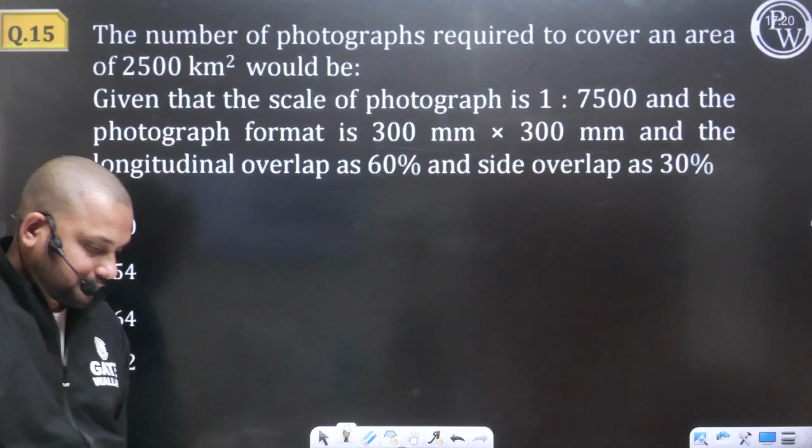This is case 1 problem. So we have discussed the 2 cases: how to calculate the total number of photographs required when the overall area is given to you, or when the area is given in terms of L into B. This is case 1 of our discussion.

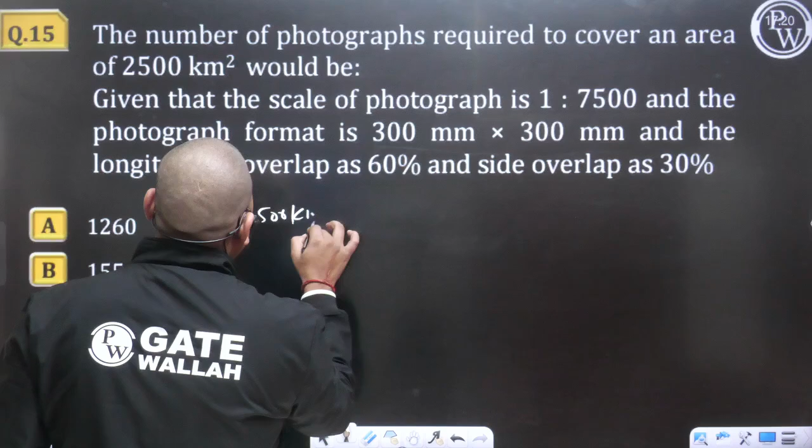The number of photographs required to cover an area of 2500 kilometer square, given that the scale of the photograph is 1:7500, the photograph format small l is 300 mm, small w is 300 mm, the longitudinal lap is 60%, and side lap is 30%.

When the overall area is given, what approach can we apply? We say the total number of photographs required will be equal to total area divided by the net effective area covered by a single photograph. A will be equal to capital L into capital W. Capital L is 1 minus longitudinal lap, into scale, into l. Similarly, capital W is 1 minus side lap, into scale, into small w.

All the values are given, so on this basis you can calculate the net effective area covered by a single photograph — this is longitudinal lap, scale, length of the photograph, and side lap, scale, width of the photograph. This is the net effective ground area covered by a single photograph. Put in all the values and calculate it in kilometer square.

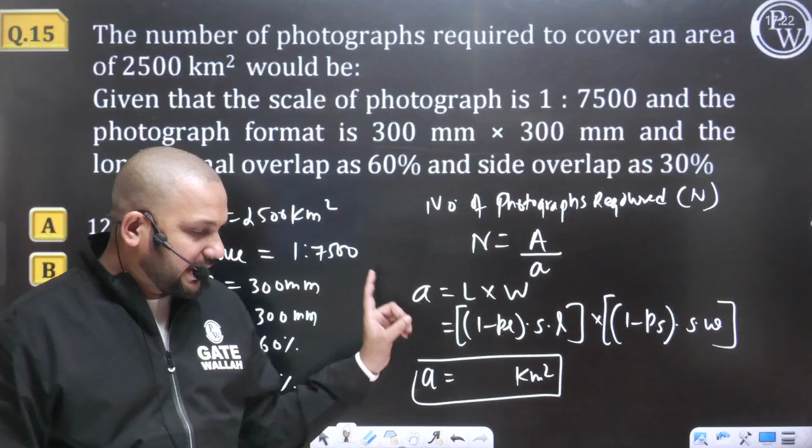We know the total area to be surveyed, and we know the area covered by a single photograph considering the longitudinal lap and side lap. Based on this explanation, when you put in the values and perform the calculation, the number of photographs required comes out to be 1764. Just put in all the values and perform the calculation.

To cover the entire area of 2500 kilometer square, the number of photographs required will be equal to 1764. I hope the entire discussion is clear to everyone. In this session, we have discussed some important concepts from highway engineering as well as surveying, and I hope the discussion for all the questions is clear to everyone.